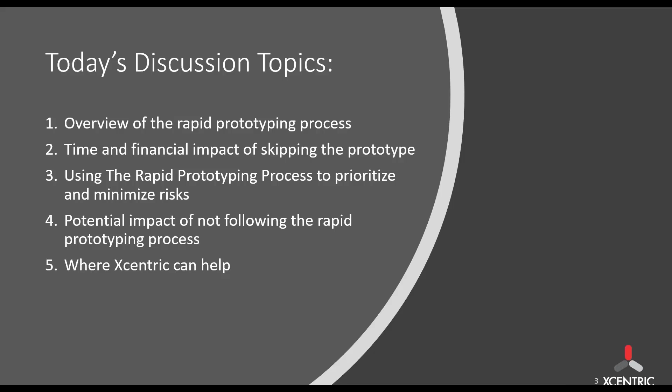So to start, I'm going to address the elephant in the room: why do engineers or designers skip prototyping in general? From my experience, product designers as well as engineers tend to skip prototyping because it's the easy place to look at as a line item and say, oh, we can just cut this out and it will quickly reduce costs. We can trust our engineers, skip it, and go with what they did on CAD and just trust it.

When in reality, making that assumption early in the process can cause expensive, unforeseen delays later on, because the earlier you're able to recognize these issues, the better the result, because making changes later on in the process is going to have a much more significant impact, which I'll go into later.

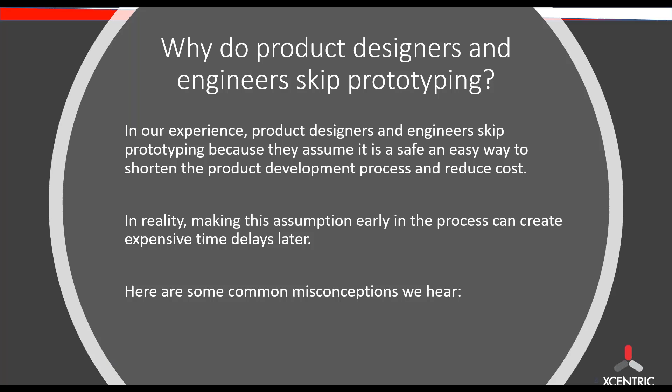So one of the common misconceptions that we hear is that doing this step is going to increase time to market. And the answer to that is really no. Prototyping is considered a bottleneck by a lot of people, but that's a misconception. That isn't always the place where you're going to run into issues.

And people think that they can go through it by just doing makeshift proof of concept models that are quick and dirty, and use a quick and dirty prototype to rush through that step to get to market faster, because they feel like if you do an early step quicker, it's going to get you to the end goal faster.

When in reality, skipping early steps in that prototyping cycle might cause you to miss very important factors in terms of the issues that you'd run into later on in manufacturing, things that would quickly snowball and cause heavier issues moving forward. We do have a polling question around this as well.

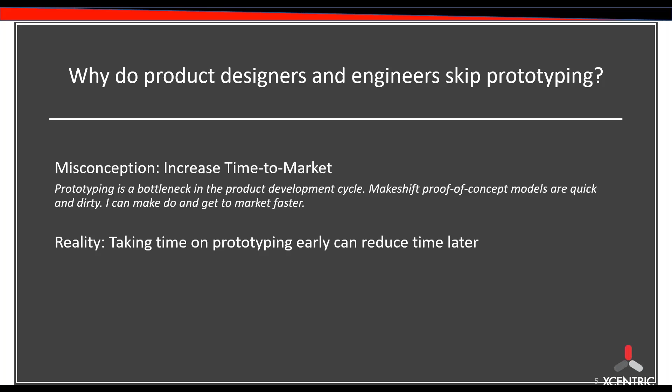Pam, would you mind putting that polling question up, in order to see where some of the people in attendance might use models and prototypes?

Oh, I didn't just stop presenting. One second.

Okay, perfect. So the poll came in. So it does look like a lot of people do some prototyping in-house using one of their own machines, but also some people outsource. But luckily, it seems like most people here do use some sort of physical prototype to some extent, which is great to see.

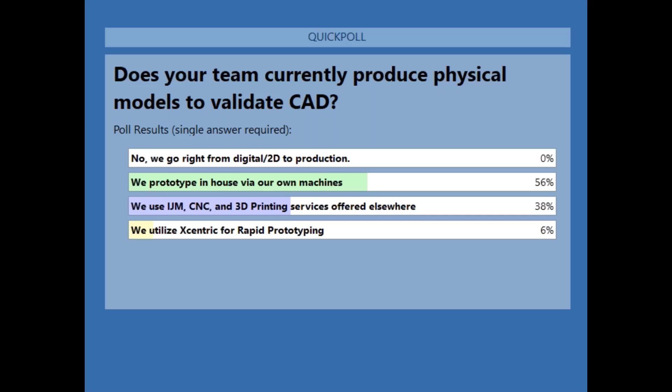Another misconception we see is that by skipping the prototyping process, you're going to actually be able to create products for less cost, because you are skipping steps that do have costs associated with them. The misconception is that running something in-house is going to be very expensive. Maybe investing in a 3D printer or an injection molding machine or something along those lines, or a CNC, is going to be a very large upfront investment.

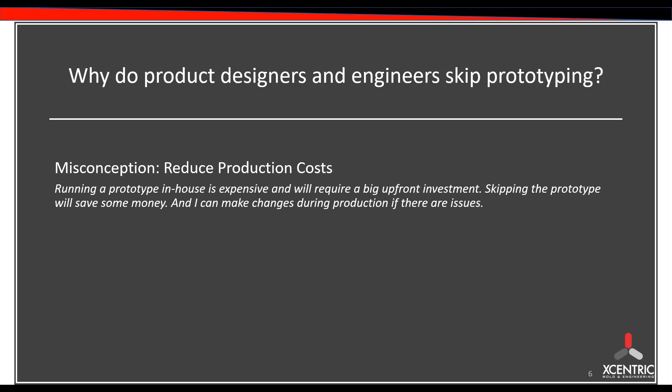So why not just skip this step altogether? It's going to save money on investing in machinery or investing in a service, and we can always just figure this out once we get to production, make the changes then. It's probably going to be a very small cost, don't have to worry about it. When in reality, prototyping and production tooling are not the same at all.

It might seem like a logical way to save money by making changes at the production stage and just rushing to get the product out as quickly as possible. But in reality, taking the extra time, going that extra step early on and running that extra model, maybe doing that extra validation, that extra meeting with a physical model in hand to do a fit check, is just going to make it so once you get to production tooling, you've already worked through all of those issues that might come up.

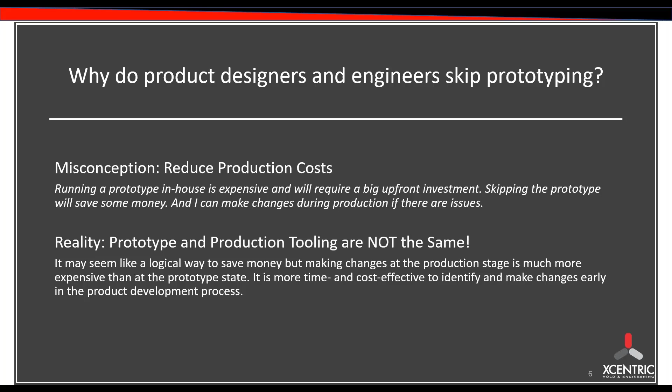Because once you get to production tooling, as you'll see later on, those changes are extremely expensive compared to, say, finding something during the 3D printing stage or the very first run, and I do believe there is another polling question after this as well. So have you ever had a production tool produce a part that needed engineering changes after the first shot? I'll give you just a couple seconds to answer that one.

So what is the rapid prototyping process and why does it really matter? Another term I've heard frequently used in conjunction with rapid prototyping is agile manufacturing, a way of doing things piecewise and very thoroughly in an iterative process to make sure that you design something properly. So what is it? It's a safe, fast, and time-effective process to get your concepts or ideas from your brain, brainstorming, whiteboard, or CAD, and advance them through prototyping and physical builds to validate them and then bring them to production.

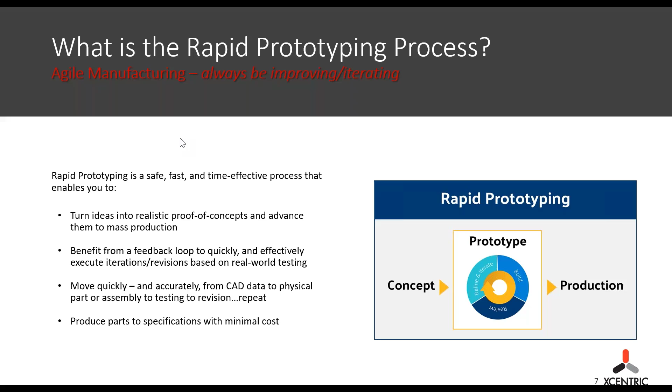One thing I'm just going to emphasize throughout the whole thing is that every step in this process is important, and skipping one step in the engineering process as a whole could really lead to so many unforeseen issues. And what if I could tell you that I could get you 5 physical designs in front of your customer and promise 25 samples and production within 3 weeks? How do you think that would change the conversation that you're having with your customers?

If you could say, hey, here's 5 different versions of your design, which of these 5 do you want to go with and what seems the best to you? And by the way, I can also get this into production in 3 weeks. How do you think that would change the table conversation that you're having with your customer, and how do you think that they would be receptive to that?

So basically, rapid prototyping provides a low-risk, fast turnaround opportunity to explore concepts. So you'll have a physical design that you can talk through, go through the brainstorming process in a much more in-depth way, and maybe explore various features or various options that otherwise you'd just be working from paper or from a CAD screen, which just doesn't provide scale or accuracy in the same light.

Also, it just allows you to design further. So you can go into more depth. Anytime you can engineer one step further and go that extra question and that extra design problem and work through it, you're just going to create a better and lower risk design for later on when you get to manufacturing.

It allows you to make better comparisons. So you can do two physical representations next to each other. I've worked at a lot of companies where they might just do one physical model and they'll use that physical model to compare against their CAD. You still run into the same issues.

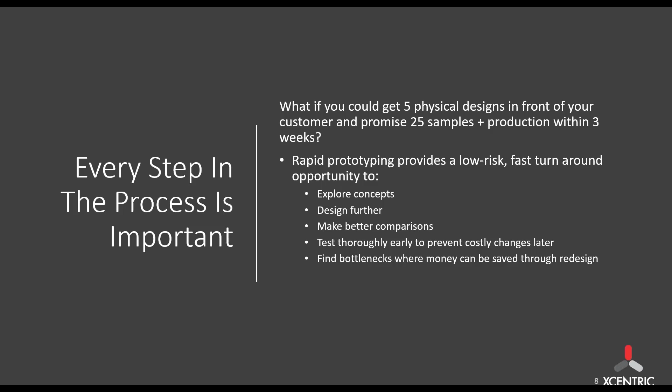And because they're the ones always providing you with that data, it might come across as being a bottleneck, when in reality, you're figuring out where those future bottlenecks are, addressing them as early on in the process as possible, and figuring out how to redesign things so that bottleneck you uncover actually isn't a bottleneck later on. It also allows you to implement changes faster and get things done quicker.

Anytime you can go from CAD to a physical model, get an in-depth conversation going and explore a concept further, and then get another physical model a week later or a few days later, it's just going to allow you to go through more changes, implement changes faster, and get a higher quality product made.

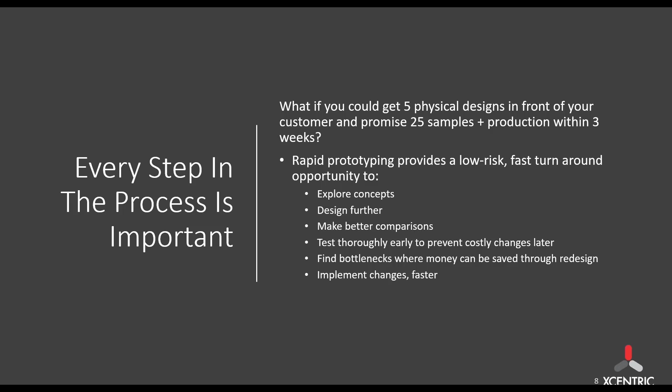All right, perfect. So, wow, everybody seems to be in agreement. So it looks like, as you all agree, prototypes are used frequently to make changes. And anytime you can get a more accurate prototype, and anytime you can produce that design and really nail it down, you're just going to get that peace of mind you need. So glad to see that everybody's already following a really, really good process, and glad to see you guys see the value in that physical prototyping aspect.

And just going to go through this slide quickly, because I do believe we've gone through this a little bit, but basically the prototyping and development process is a very defined process at this point. It's something that engineers have been using for a very long time, and it's a very validated process, and each phase is there to iterate upon, generate more information, and use that information to continue to advance your product to production, work through and address all of the problems that might come up, and get your product developed and produced.

And in general, I'm a very firm believer that whenever you're working through something that has a lot of phases or a lot of different moving pieces involved, you should let the experts do what the experts do. I won't say there's no, but it's very rare for you to find an engineer that's a true jack of all trades. They know the ins and outs of 3D printing, CNC machining, injection molding, you name it, the financial aspect of it as well, design for manufacturing. It's very rare to find somebody that can do absolutely everything perfectly. And you can say that across most companies as well.

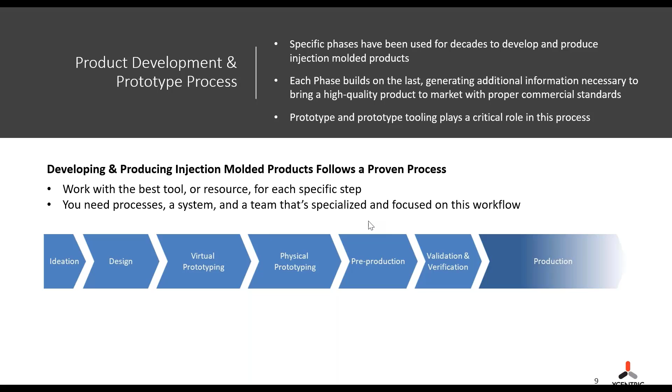But basically, what I'm getting at is working with the best tool or resource you can for each specific step, and working with resources that might be able to shed more light, especially early on in the process, will just improve this workflow, make going from step to step more efficient, more effective, and make it so you don't run into unforeseen issues down the line. So it's a very defined process, and it's really worth following because it's tried, true, and proven out.

Also, as I've been saying, investing earlier in the prototyping process will make it so everything is handled as efficiently as possible. The earlier you get involved with your customers in these types of engagements around critical issues that might be coming up, design for manufacturing, what actual timelines look like, when a part needs to be in somebody's hands, when maybe the conversation's happening with investors where you need to bring the best thing you can to the table, figuring out all of those need-by dates, qualifications and necessities earlier in the engagement makes it so every person you work with, every tool you need to schedule time on, is handled as efficiently as possible.

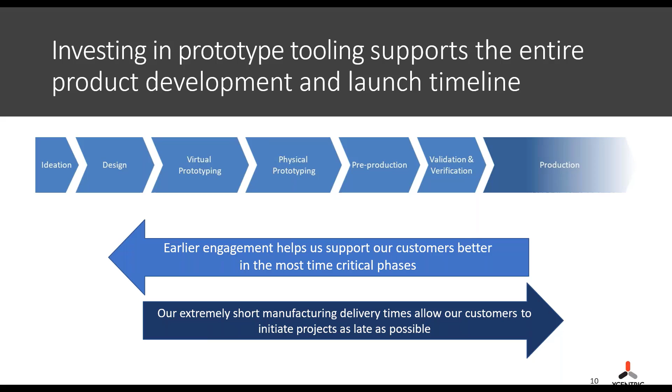And you're not having to spend extra money putting out fires and dealing with emergencies, because whenever you shorten a timeline, whenever you add a factor that causes it to be more of an emergency and a make-or-break type of scenario, that's just going to quickly ramp up the pricing. So the earlier you can get on top of that and address them, when things truly become critical and can't go wrong, you don't have to worry about it. You have the peace of mind that it won't go wrong because you already worked through those issues.

And as I was saying before, really the pricing ramps up heavily as you get longer into the process. It's pretty much a factor of 10 from step to step. So whether you go from basically just the whiteboards, the idea phase, that's going to be obviously the most cheap because it has the least investment.

Then design phase, you're going to have people doing things on CAD, takes more engineering time, more time involved. Then you get to rapid prototyping. That's going to be involving either aluminum tooling, 3D printers, maybe 3-axis, 5-axis CNCs, things of that nature. So it's going to be more engineering time, more machinery time, as well as more validation.

Then it's going to go to prototyping tooling. I'd say that's where we tend to fit in best. Still going to be a bit more expensive than some of the other rapid prototyping aspects, but in this phase, you're able to really do a lot of your design and DFM work and get that validated down, work through a lot of those changes that maybe were missed in the rapid prototyping stage just because 3D printing doesn't necessarily find everything, and then work through those before getting to production tooling,

because for every small thing that you need to do once it gets to production, it's a 10x price versus if you were to find it earlier, maybe even 100x price. So it's extremely important to get through all of these, make the changes and corrections as early in the process as possible, because once you get to a production tool where you're expecting to hit millions of quantities, things are going to be extremely expensive at that point.

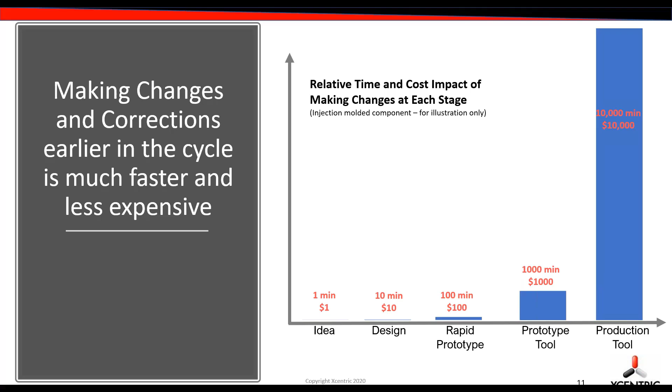Okay. So we've noticed that there has been, especially lately, a trend that US-based parts and conversations are important, and that is kind of a theme seen by the attendees as well. Great to see. I'll go into this a little bit more later. We are US-based, and I'll explain that more.

So as I was saying in the last slide, really getting things figured out as early as possible is going to be important. But I'd say that's even amplified more when dealing overseas, because you're also adding more factors into the equation in terms of making engineering changes, or maybe if things aren't perfect, you're dealing with a significant time difference, maybe some language barriers, maybe significantly extra timing for shipments, things of that nature. That's just going to add significantly more time to it.

So if you make these changes after production when the steel tool is cut, it's going to be just extremely expensive, time consuming, and more likely than not frustrating trying to make sure you get the changes done correctly and have that peace of mind that even the design change was done right. And not only that, you're adding a lot of time to it.

Well, if you follow more of the prototype mold stage and get this done early on, you'll be able to work through it extremely quickly, have those conversations extremely quickly, get the engineering changes implemented in a fast and efficient manner, and then just get going and get to that next phase of production quick without that very long delay of having a steel tool cut and then moving that route.

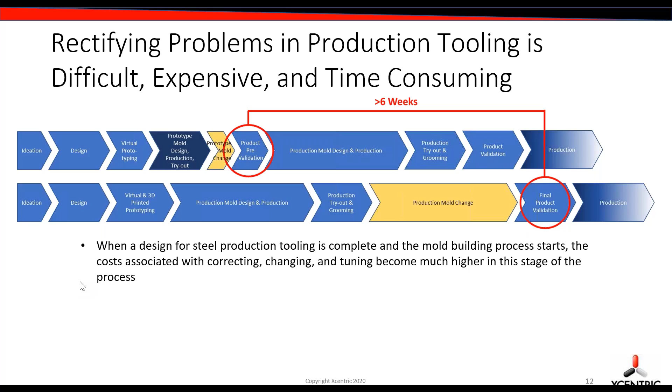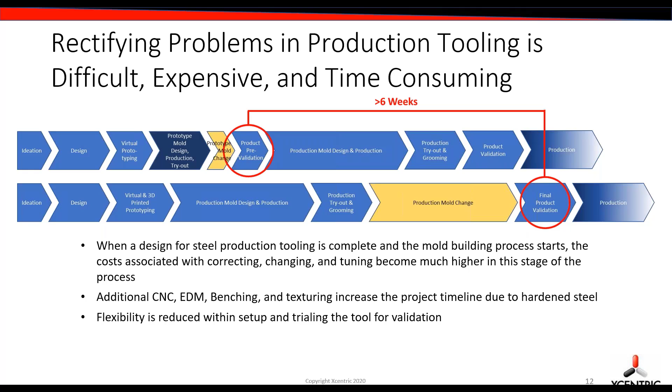Also, doing more work like CNC benching, texturing on a steel tool is also just going to add more time to it as well, just because working and modifying steel is going to be a lot more difficult and time consuming, and you're going to lose a lot of that flexibility around setup and trial going that route versus working with more pre-validation and prototyping tooling.

So what sort of issues can be uncovered by working with prototyping tooling, since they aren't necessarily created equally? It's going to be the ability to get feedback on dimensional issues. So, for example, in our process, getting 25 free samples, checking them out, getting the validation on those dimensional issues, seeing if any changes need to be done, and working through that as quickly as possible.

Also, you're going to see how the material behaves differently in an injection molding process versus, say, a 3D printing process or a machined plastic process or something like that. There's a lot of factors that go into plastics that might not get uncovered until you actually melt that plastic down and inject it. Things like shrinkage, warp, sink, splay, aesthetics might get affected, and this is the type of thing that you would never see until you run that first shot.

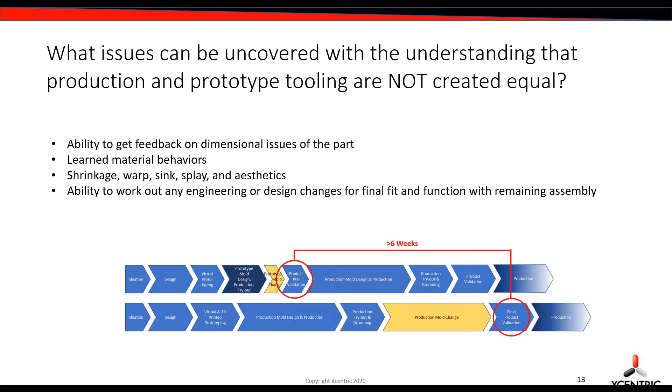So running it in a lower risk atmosphere is just going to give you the ability to work through those design changes in a much more efficient manner. So pretty much a lot of this can get summed down in risk severity through design iterations. What I mean by that is the rapid prototyping process is very defined in a risk severity kind of way. And I think that's what I've been getting at. And I mean risk from both a time and money perspective.

So working through CAD is always going to be how people start. So I guess whiteboard and then CAD, and working through those engineering problems from a high level is always going to be how people start, and that's very low risk. And then people will start building on that to produce physical prototypes using 3D printing in order to work through some of the form, fit, and prototyping. And this is very low risk because in general, 3D printing is going to be the lowest cost form of doing a quick and dirty mock-up of something.

I like to think of this as like a simulation that you might run on a software, but it's just a physical simulation instead, because software can't do everything that a physical prototype can do. So you kind of simulate what that part looks like in a very low risk kind of way using 3D printing. Use that to work through some of the high level problems and more coarse issues.

And then once you get those types of problems worked through, you can start bridging to injection molding either through CNC or start working through more advanced types of problems like the actual material characteristics or actual surface finishes that you'd be dealing with in injection molding, shrinkage, things of that nature. So basically you use the low risk stuff to work through the higher level problems, and then get a little bit more granular and work through more of the DFM type of problems as you progress through that rapid prototyping process.

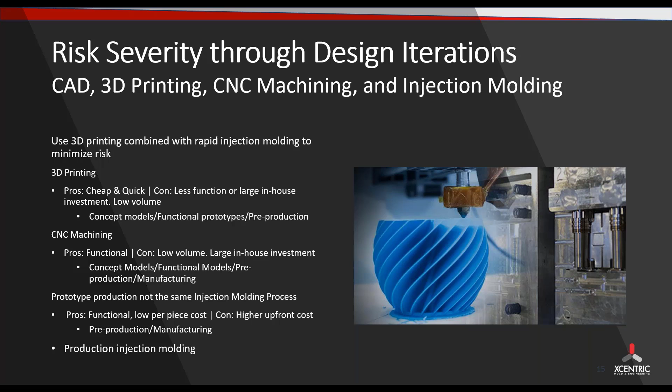So what's the potential impact of skipping any part of the process? So I think the easiest one to understand, and the easiest one that I've seen happen time and again, is working with stakeholders and investors in terms of the concept that you're designing and the part that you're looking to produce.

It's going to be a much different conversation going to an investor with, say, 2 or 3 models of a given design, being like, hey, here are the 3 parts we thought that you'd like. Which of these parts is the one that you like the most? Do you have any feedback for us? Here, let me hand this to you. You can go through the entire thing, see everything that you would want to go through. Let's talk about it in depth right now, and let's figure out if this is something that you want to go through.

So basically, it allows you to test more designs and dial in the best thing for marketing and what you want to present to an investor in order to get as much of an investment and as many sales as possible. Basically, what I'm getting at is don't settle for using a 2D print or 2D mock-up when trying to get somebody to invest in your model. It's going to be a significantly stronger conversation if you go to them with a physical prototype and say, hey, here's what we're looking to produce. Do you have feedback for us?

Also, costly modifications. So if you skip things, especially functional prototypes, you're going to run into those costly engineering changes and modifications that I was talking about earlier. So you really want to work through testing fit, testing function of materials, making sure it's designed properly for manufacturability, so things are equivalent thicknesses throughout and various things are worked through.

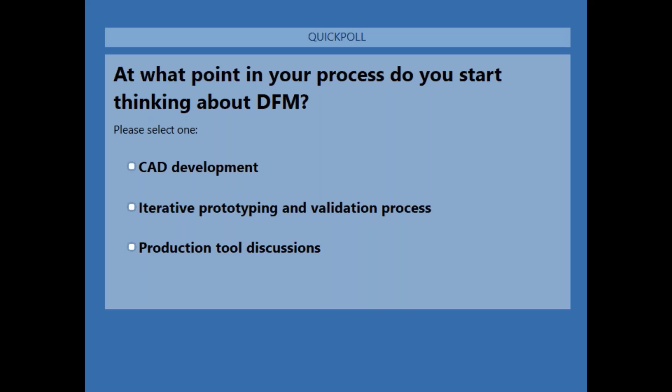All right, so it does look like most people start thinking about DFM very early in the CAD development. That's awesome. That was what I was hoping to see. Does look like some people are doing it more in the production tool discussion. Hopefully, some of what I've talked about now will help see why there are more cost-effective ways to address that now. But do love to see that a lot of the people in attendance are thinking about that kind of

stuff early, because I'd say, from my experience specifically, that tends to be the thing that nips people in the bud late the most, not really thinking about DFM until it gets to production, and then they're like, oh wow, we could have done this a lot better, and things just don't go perfectly. So glad to see a lot of people are thinking about that early on, and hopefully we'll be able to help out more people as well.

So what are our services? Kind of summed up, they're fast and flexible. So whether it comes to geometry or materials, we want to basically produce your design. We don't want to make you take your design and fit it into our box. We want to work with basically the full gamut of design. So we want to help you through all of those complex problems. We want to get the design the way you need it made, without having to make any necessarily massive design sacrifices, things of that nature.

We also have the ability to do overmolding as well as two-shot molding, insert molding, many different surface finish requirements as well as custom ones, and we can do texturing as well as etching. And in terms of materials, we have 50 different resins that can be basically same-day production and have an extremely fast turnaround, as well as another 100 that will also have a very quick turnaround. In general, we're able to offer about 15 business days in terms of our production of tools and then getting parts out to you, with very frequently being able to push that up even further.

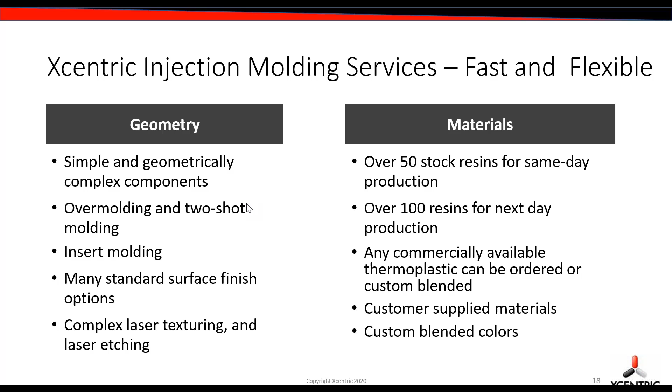And in general, we can work with just about any material you need as well. So if you do have a material that is very specifically needed for a given project or a given functionality, we usually have the ability to source and work with it. I'd say we have a very experienced team that's able to work with a wide variety of custom blended colors, custom types of materials, and various maybe more difficult materials that may have more engineering problems or constraints associated with them that we'd be happy to work with you through.

And then, like I was saying before, we do injection molding, CNC, as well as additive manufacturing, also known as 3D printing. And I'd say that that's the order in which we tend to specialize in things as well. So injection molding really is our bread and butter, doing prototype injection molding to low to mid volume, and helping through those complex design problems and making it so we get the mold to produce the parts that you need for your project. That said, we also do very significant work in terms of CNC, both 3, 4, and 5-axis machines to get extremely precise parts to do either smaller runs as well as larger runs, depending on what sort of project it is and what sort of needs you guys are looking for.

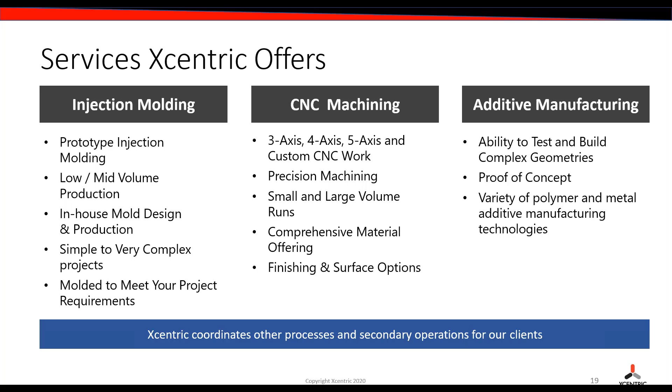And then we also have 3D printers. I've worked in 3D printing for quite a long time, and we have just about everything you'd need there in terms of capabilities and what you'd be looking for, and help you test out those geometries, various, let's say, high-level material properties, as well as prove out those concepts.

Honestly, from my perspective, I want to help you guys out as early as physically possible. If you don't even necessarily have your CAD finalized, I'm still happy to get on a phone with you, talk through your project, learn a little bit about what you're trying to do, and maybe help you through some of those early engineering problems, and really start that DFM and prototyping process as early as possible. I have no problem sharing my expertise as well as my colleagues' engineering abilities to work through those problems, and make sure that you have an expert with you every step of the way to make sure it goes right.

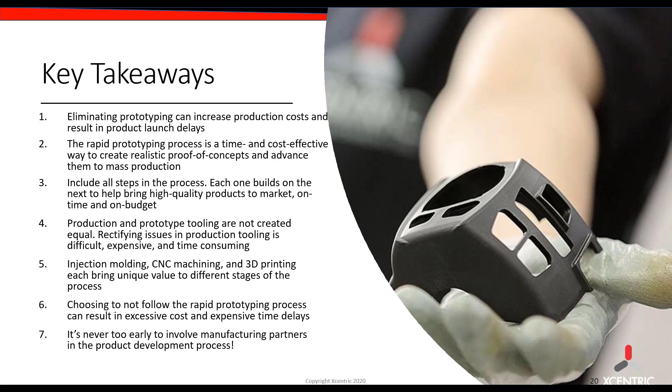We do have some questions that came in, so let's start with: what is the best process for a small volume of parts? Yeah, so I'd say it's going to really depend on what you define as small volume. It's hard for me to give an exact answer, because small volume can mean something completely different to every single customer I talk to. In general, I like to work in the under 100,000 frame, and in that frame there are a couple different levels. If you're in the, say, 1 or 2 off, I'd say 3D printing and CNC would probably be the best option to work through a very specific one-off type problem.

But if it's, say, 25 parts upwards of 100,000, if that's considered small volume for you, I think a combination of maybe 3D printing and CNC with that prototyping tooling would be best, because you can quickly work through those early run samples. I wouldn't necessarily say quick and dirty at the point of prototyping tooling, but let's say pre-production parts. Basically get the peace of mind, validate on the smaller batch, and then scale up through that.